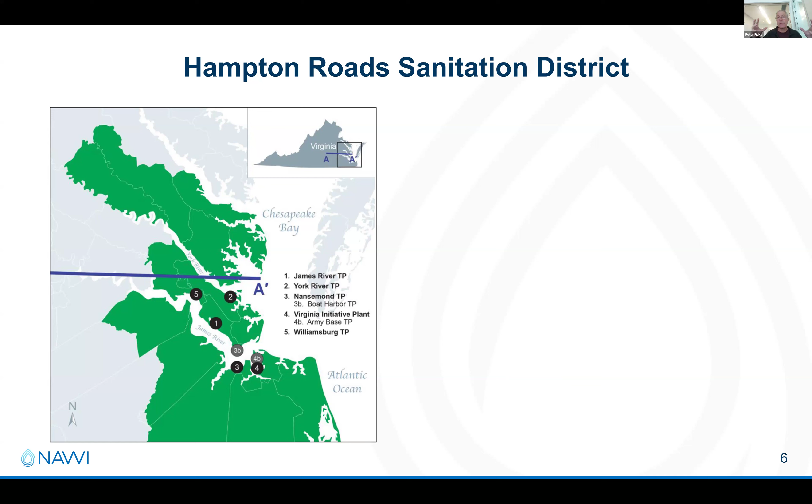Many of you know this well, but I think one of the things that makes Hampton Roads so important is that Hampton Roads is a national treasure, because it's the confluence of a bunch of circumstances.

First of all, it's the 14th largest wastewater utility. It serves almost 2 million residents and multiple cities around Eastern Virginia. But the key thing that really puts Hampton Roads into the special place that it is, is that it's at the mouth of the Chesapeake Bay, one of the most sensitive estuaries in the United States.

In fact, it's one of the places in the country where concerns about nutrient management first really drove innovation, both regulatory innovation and technological innovation. So because of where they live and the role that they play, Hampton Roads ends up being a very important partner for us as we innovate on how to create more sustainable water and wastewater distribution systems.

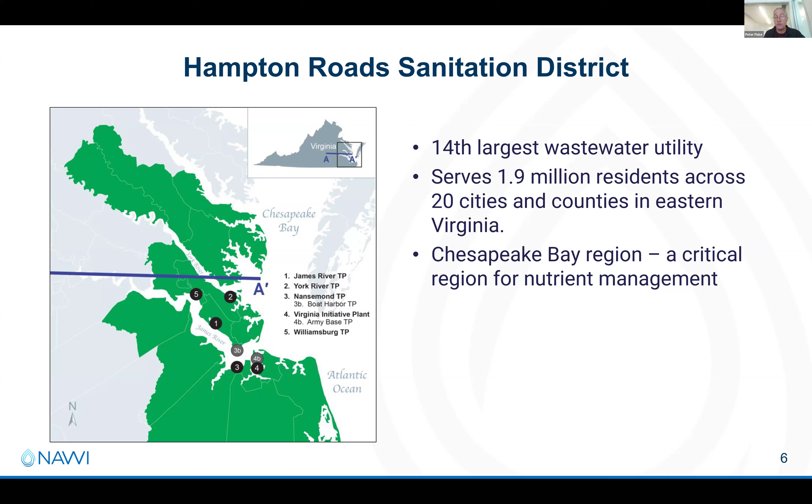And with that, I invited our guests here for us to learn more about this, not just the utility itself, but Charles and Jay, also the role and the way that innovation works and how you build an innovation ecosystem for the utility that you run. So with that, Jay, Charles, thank you so much for joining us here at NAWI, and tell us about Hampton Roads.

Great, can you see my screen okay? We can. Perfect, awesome. Well, great. Thanks, Peter, what a great intro that was.

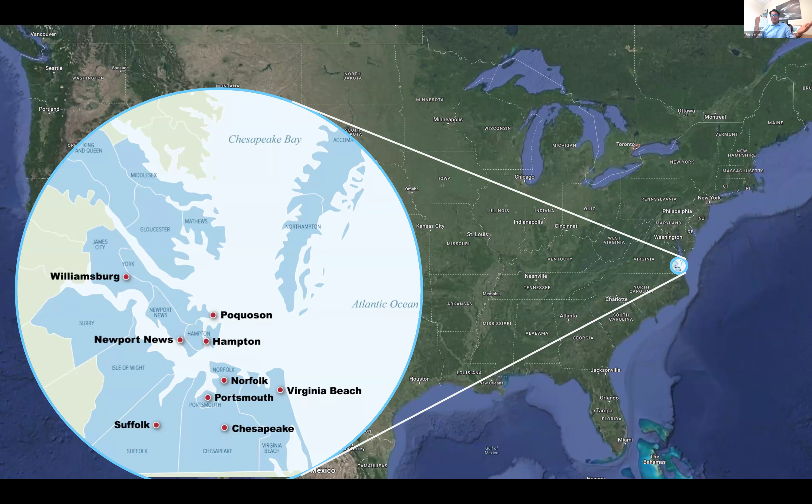Again, I can skip all my maps because you already talked about where we are in Eastern Virginia. We're the 14th largest, we serve 1.9 million people. What's crazy about our service area, it's 5,000 square miles, about the size of Connecticut. So I'm going to jump right into it.

Bottom line up front, we are trying to build this water technology focused ecosystem. Basically, we want to be the Silicon Valley of water technology for the country. And so what we're trying to do is leverage HRSD as an anchor for economic development, and we'll talk a little bit more about that.

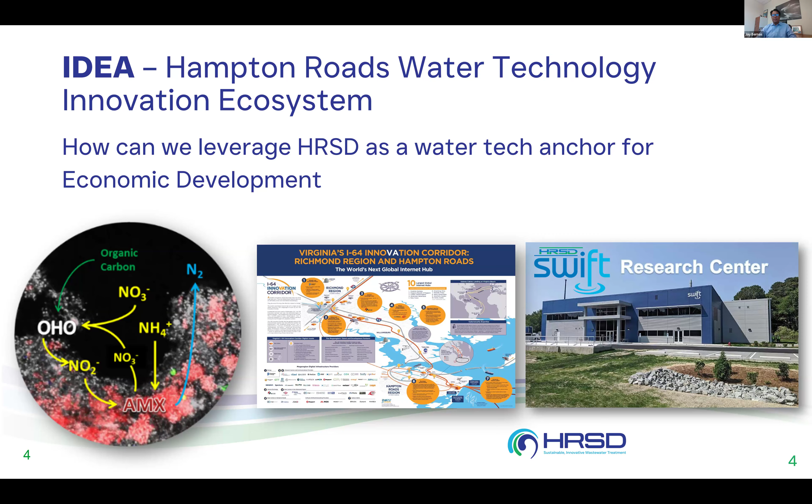So these are our objectives. Obviously, we want to advance water technologies. In our minds, we want to be tech enablers, and we'll talk about the ecosystem concept we're trying to develop. One of the things we've always done is research ways to keep our ratepayer bills low, and so in our culture, it's embedded in us to be innovative.

Dr. Bott's going to talk about what our current focus areas are: process intensification and decarbonization. One of the reasons why we are here today is to foster collaboration and knowledge exchange, because we're trying to build partnerships around the country to build out this ecosystem, and at the end of the day, we're trying to create this demand side innovation.

So big picture, this is really an optimization problem. If you take a step back and look at our organization and our great assets, we've got one of the largest R&D groups in the country. How can you optimize that to make a larger community impact?

We're a political subdivision of the Commonwealth. We exist to protect public health and the environment, but surely we can do more if we leverage all these assets. One of the ways we can do that is by driving economic development through this whole ecosystem concept.

So these are the four opportunities that we've identified. One, we can incubate or accelerate companies. So working with Imagine H2O and Xylem, I had a great meeting with Xylem Labs today. We can attract companies potentially. One of the ways this idea really came about was last September, Dr. Bott was like, oh yeah, by the way, some folks from Samsung are flying in from South Korea.

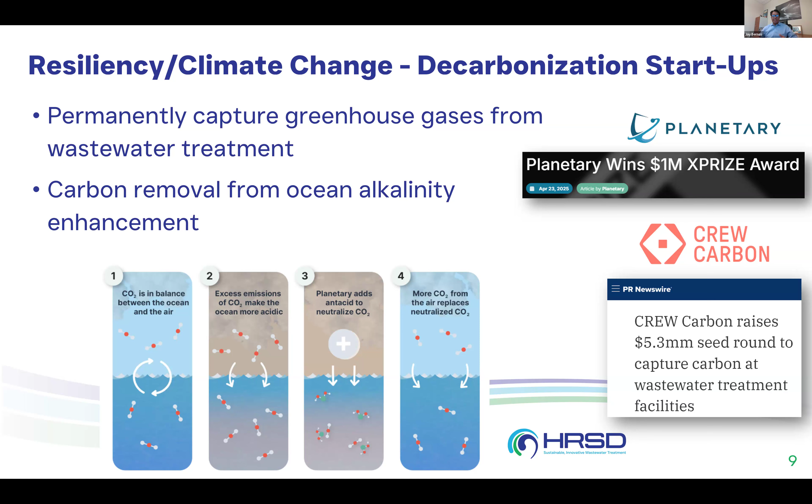So just think about that. HRSD is going to install this tech at our plants. Other utilities will see that, they can come visit, see that the tech works. We'll have all the data, and we will help those companies scale.

So here's the idea about industrial symbiosis. This is one of our plants in Virginia Beach, called our Atlantic plant, 54 million gallons a day capacity. Many plants around the country have hundreds of acres around them because this acreage was purchased as buffer.

Because we're a political subdivision, a tax-exempt entity, the city of Virginia Beach receives no revenue for that vacant farmland. So from an optimization problem, what is the highest, best use of that land? Could it be a data center that can use that digester gas? This plant averages 40 to 45 million gallons a day - could they use some of that water to recycle for their cooling?

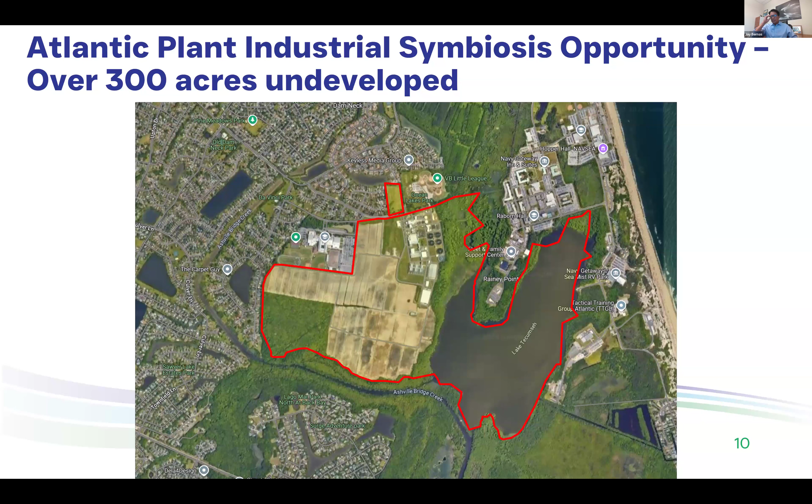So we just had a meeting this week about a potential data center that may co-locate on this property. But again, the whole circular water economy concept - what can we do with our existing assets to leverage them to make a difference in our community?

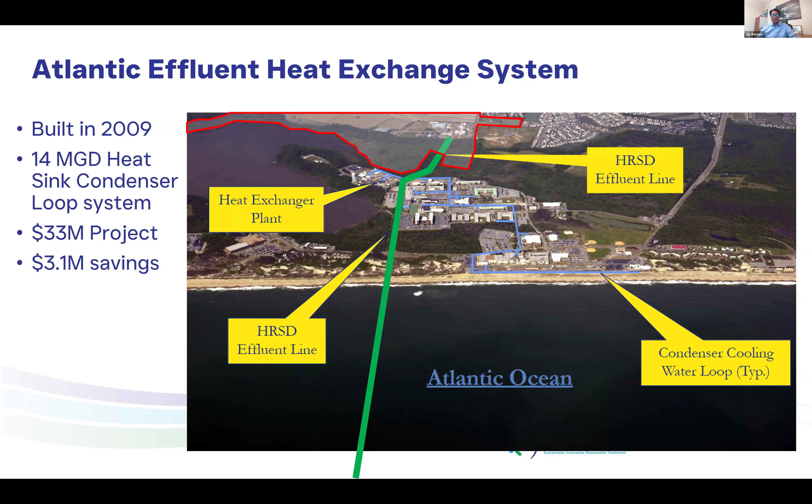Here's an example: there's an adjacent military base next to our Atlantic treatment plant. In 2009, they tapped our 66-inch effluent because wastewater is at a relatively stable temperature. They created a heat sink condenser loop system, like a geothermal system at their plant site. In 2009, they saved $3 million a year, and this is still in operation today.

So I'm going to shift gears real quick and talk about our SWIFT program. It's one of the largest water projects of its kind in the world. Bottom line up front: we saved our region $5 billion.

Like Peter said, we are part of the Chesapeake Bay region, but that's one huge regulation. The second big regulation we're dealing with is sanitary sewer overflows. Had we not collaborated with our region, and everybody did their own thing, we would have had to spend $7.8 billion complying with these 2 regulations.

But what we did is we leveraged EPA's integrated plan. EPA's integrated plan framework recognizes that communities don't have unlimited funds to spend on these environmental projects. And so the judge approved our plan in February of 2022.

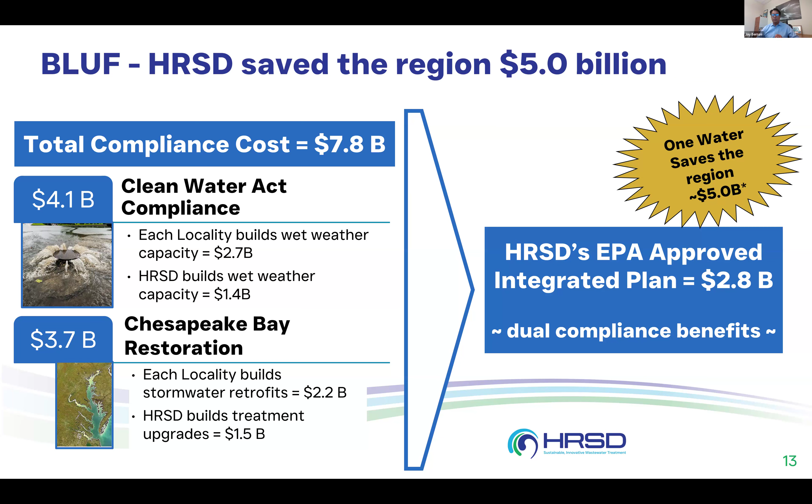Basically our SWIFT project, the Sustainable Water Initiative for Tomorrow, has dual compliance benefits, and we can do this for $2.8 billion. That saved the region $5 billion. This is probably one of the best examples in the country of not just integrated planning, but using one water for your community, one water concepts.

So this is what SWIFT is. Currently, we take our highly treated wastewater effluent and discharge it into the bay or into the ocean. The idea is dropping an advanced water treatment plant adjacent to an existing wastewater plant, pumping that water.

That water is taken to drinking water quality standards and pumped into our aquifer, creating a sustainable groundwater supply. It also reduces the nutrients going into the bay. I'll talk a little bit about how we could potentially reduce, stop, or slow the rate of land subsidence, and also protect groundwater from saltwater intrusion.

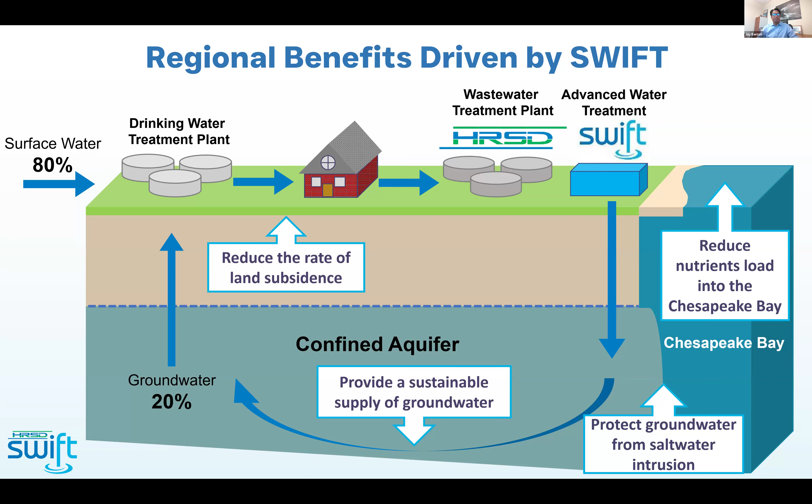I know there are a lot of water reuse folks on the call, but for members of the public who aren't familiar with water reuse, they may not know that this is going on not just around the country, but around the world.

In terms of nutrients, just to quantify the difference we're making, if you compare 2021 to 2028, we are reducing total nitrogen by over 70%, and reducing total phosphorus by over 50% with this project.

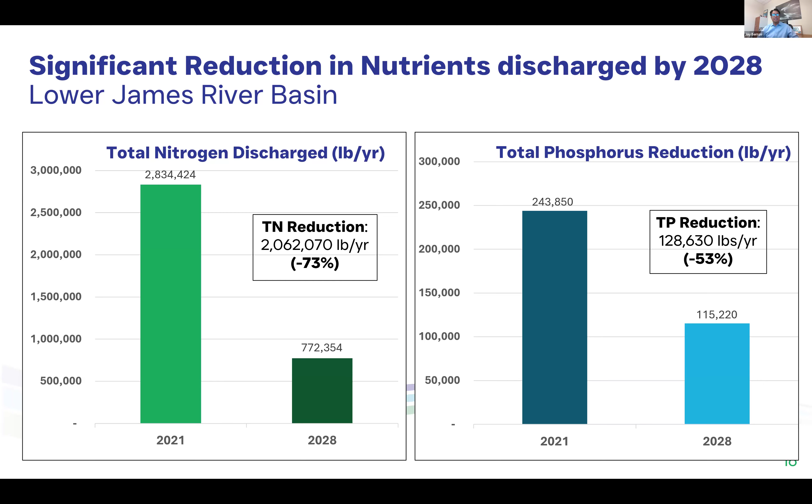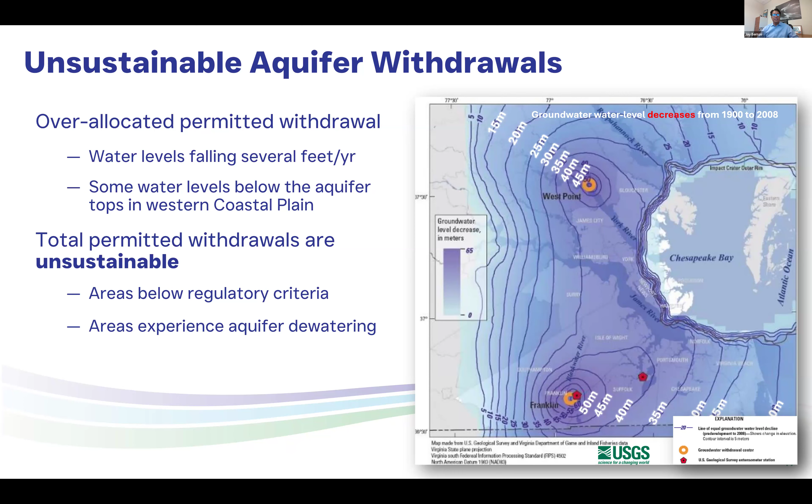The idea is, and we've got data suggesting, that if we can pump water back into the aquifer, we can either slow or stop the land subsidence component. About 50% of observed sea level rise is attributed to land subsidence, and about half of that is due to over-withdrawal of the aquifer.

If you haven't heard, Jakarta is the fastest sinking city in the world. They're primarily sinking fast because of all the wells—they're pulling water out of the groundwater and it's causing them to sink. They're an island right next to the ocean, so now they're experiencing significant sea level rise, and they're actually looking to move their capital city inland.

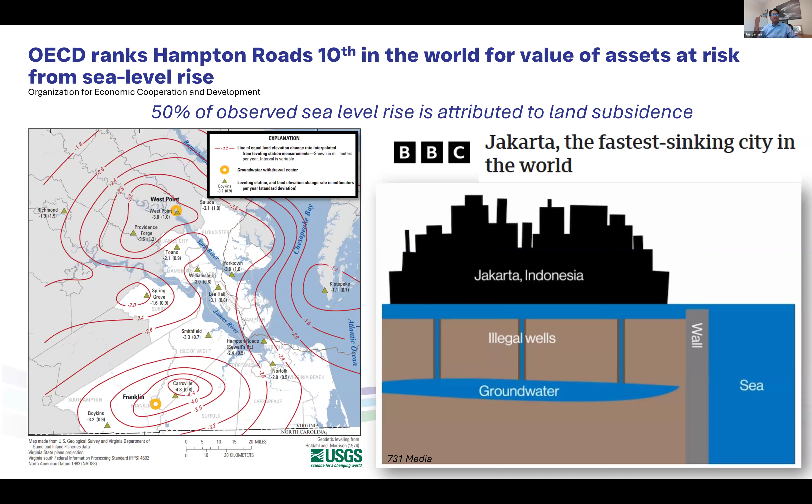So this is a quick update on SWIFT. We're looking to put 50 million gallons a day of SWIFT water by 2029 with 2 plants. The first plant will come online in 2026, and the second plant will come online in 2029.

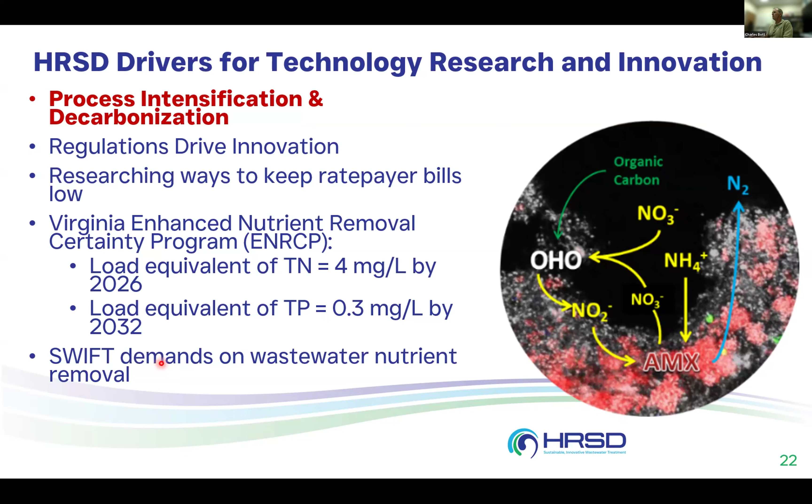So speaking of SWIFT, I'll talk about some of our interests. So first of all, SWIFT is really based on CBAT, or carbon-based advanced treatment. No membranes, and one very important part of this from an advanced treatment standpoint is that it requires a really good wastewater plant upstream doing really good nitrogen removal in particular. And that, of course, brings some other benefits in terms of emerging contaminants.

We've done a lot of work on co-metabolic 1,4-dioxane removal with propane addition, and this is actually operating full scale now at the research center, and is in design for the second full scale facility. We've also done a lot of work on removal of those emerging contaminants and disinfection byproducts through biofiltration.

A very important topic for us right now is minimizing GAC usage for PFAS removal. We have a number of projects, so minimize the amount of GAC that we use, or make the reactivation of that GAC more effective and more reliably mineralizing those PFAS compounds.

We've got a lot of work now going on recharge well design and operation. We've learned a lot about what not to do with recharge wells, and we're working hard to figure out what are the appropriate design and operational criteria for these recharge wells, which are a really big investment in managed aquifer recharge.

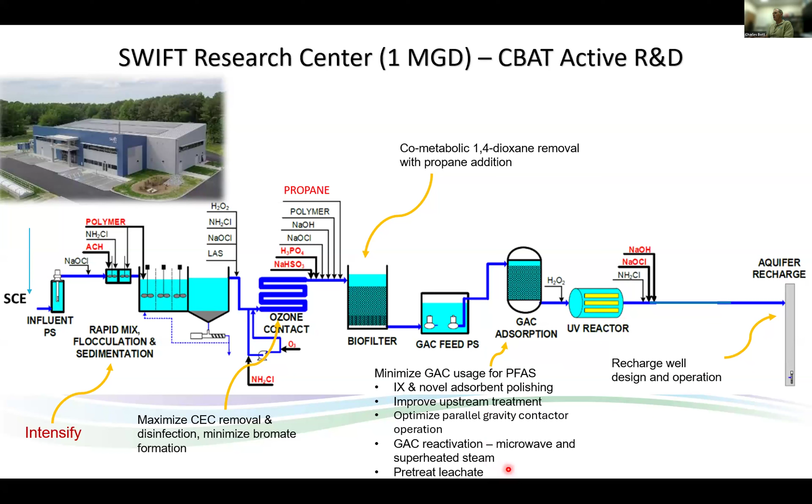We also have done work on pre-treating leachate as a means of better managing compounds, including both PFAS and 1,4-dioxane. So building on a successful pilot, now full-scale biological treatment of 1,4-dioxane at a landfill. This is a waste management landfill using tetrahydrofuran as a co-substrate.

So a few years ago, we partnered with Waste Management to implement that. It effectively removes all of the 1,4-dioxane from this landfill leachate in their existing biological treatment system, which was a really cost-effective solution for us and for Waste Management.

So building on that, we're now moving into specifically going after PFAS. That includes pilots of foam fractionation, which really, a foam fractionation pilot was not necessary. Lab testing was sufficient to confirm that foam fractionation would be effective on the pre-treated leachate, the biologically pre-treated leachate. So really, foam fractionation was not necessary.

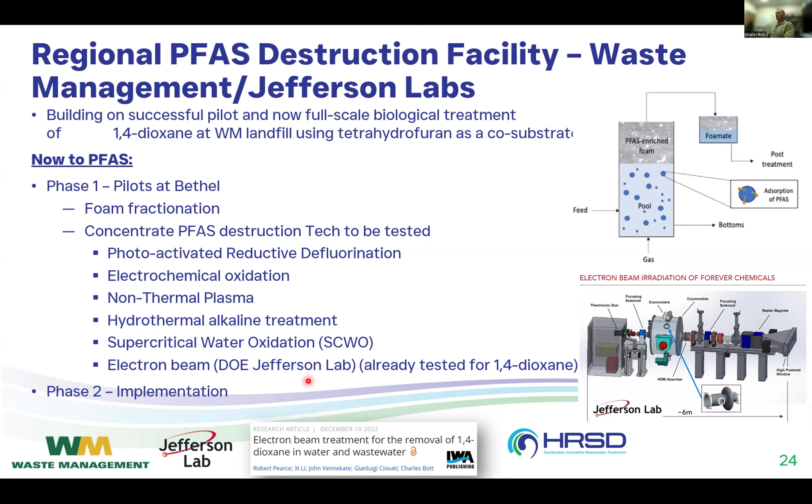So with that in mind, what I really would like to do now is take a bit of a deep dive into some of our work in the wastewater space.

I mentioned already that nitrogen removal in the wastewater plant is an absolutely fundamental and critical part of making CBAT work, and it's a critical part of what we need for compliance with the Chesapeake Bay program. We've spent a pile of money on the capital and now on the operational costs associated with doing nitrogen removal. The conventional nitrogen removal is what we know how to do.

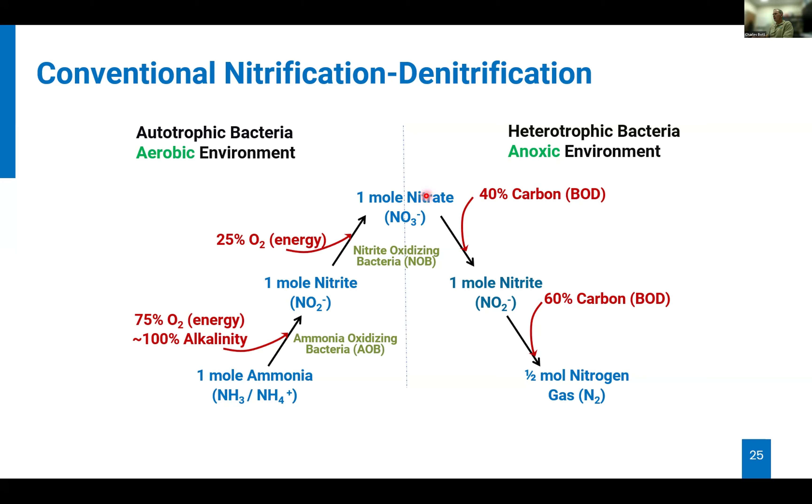Since we're taking a deep dive, I want to make sure everybody is clear on what we're talking about here. When we do conventional nitrogen removal under aerobic conditions, we oxidize ammonia to nitrate in two steps with ammonia oxidizing bacteria and nitrite oxidizing bacteria, although now we know about comammox that can make this oxidation in one step, one single organism. Then we do denitrification of nitrate back to nitrogen gas, and we know how to do this.

And for SWIFT and for meeting the low level requirements we need in the Chesapeake Bay, we know how to do this. But it's not easy. I mean, it's really challenging and it's really expensive, and it's already reliant on sensors and sensor-based control systems to make this as cost-effective as possible.

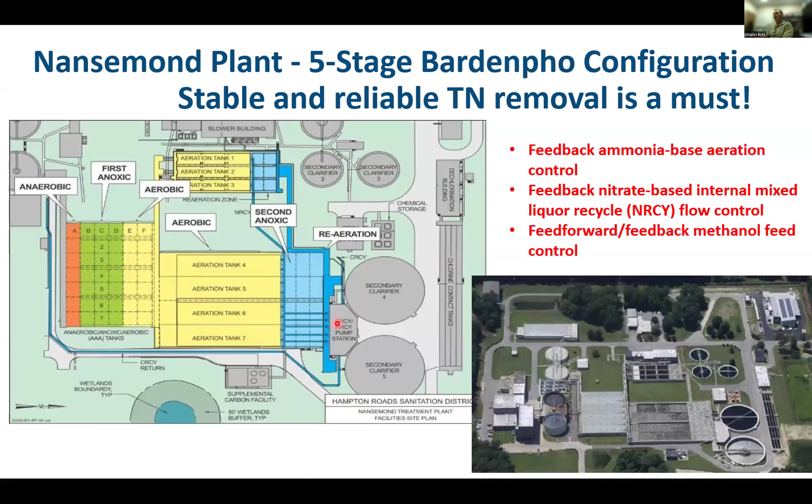It turns out that this is really hard to do in the mainstream part of a treatment plant. It's quite easy to do in the side stream and warm water that's very high in ammonia. We know how to do this, but in the main treatment plant, it's really a challenge.

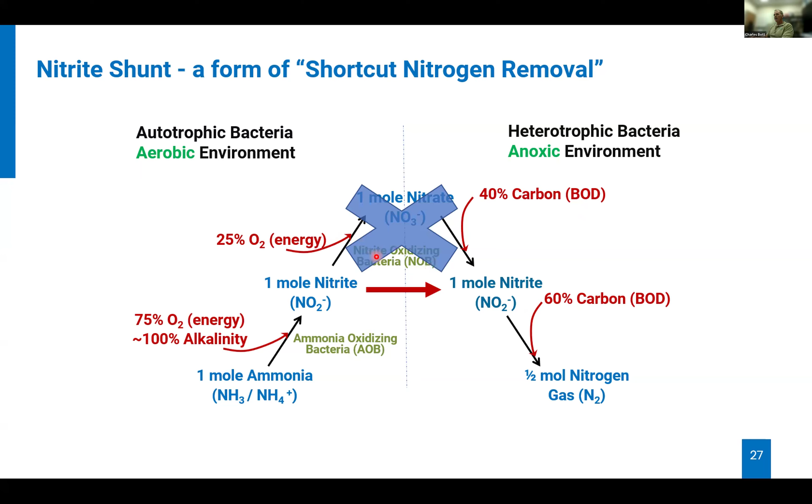And then if we take that one step further and start talking about Anammox, an organism that grows quite slowly but uses ammonia as its electron donor and nitrite as its electron acceptor, going straight to nitrogen gas, well, then we end up with a process that's now known as deammonification or partial nitritation, Anammox, PNA. This is, of course, the goal. This is where we want to go.

There are 2 big challenges: retaining Anammox and out-selecting NOB. Number 1, I think we've pretty well figured out. We know how to grow Anammox. They're tough, they grow slowly. We need to accommodate their slow growth rate, but we know how to do that. It's the NOB out-selection part that's hard, except in side stream. And so we've been doing this in side stream.

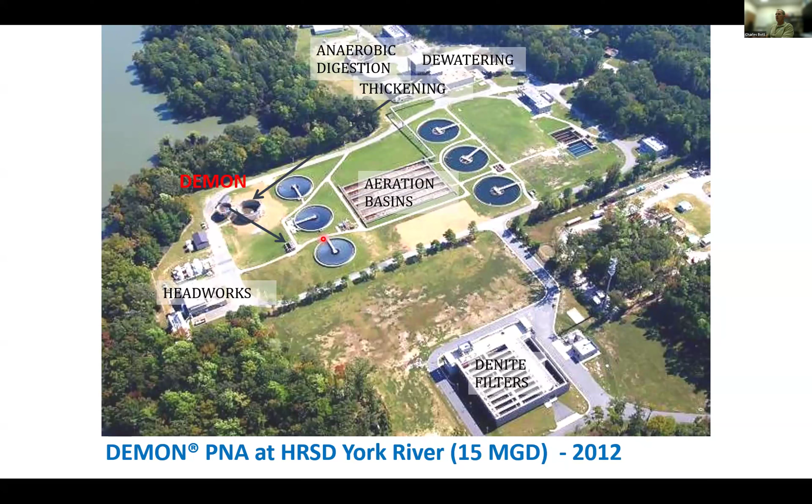We installed Demon at our York River plant in 2012. This was the first side stream deammonification process in North America. And this little tank here, that little baby tank there, treats about 20% of the nitrogen load on this plant effectively for free. So doing PNA on the side stream is just a no-brainer now.

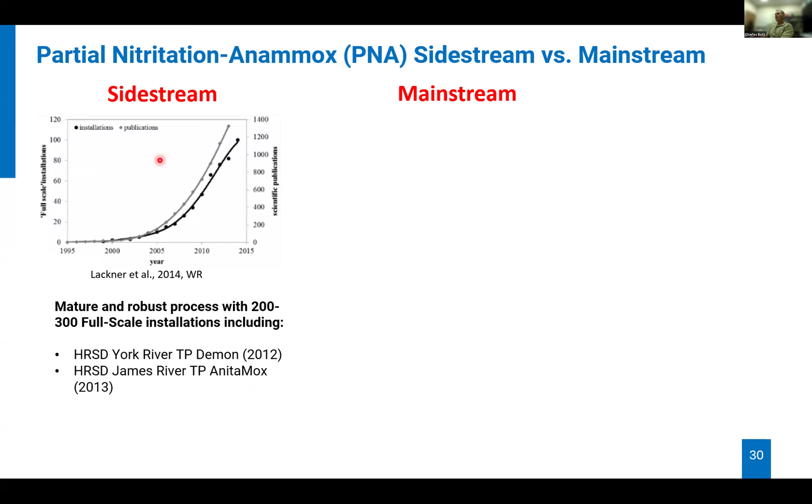We did it with a different process called AnitaMox at our James River treatment plant. We're installing another one at another treatment plant and starting that up this year. So side stream is no problem. It's mature now. It's not plug and play, but it's certainly mature.

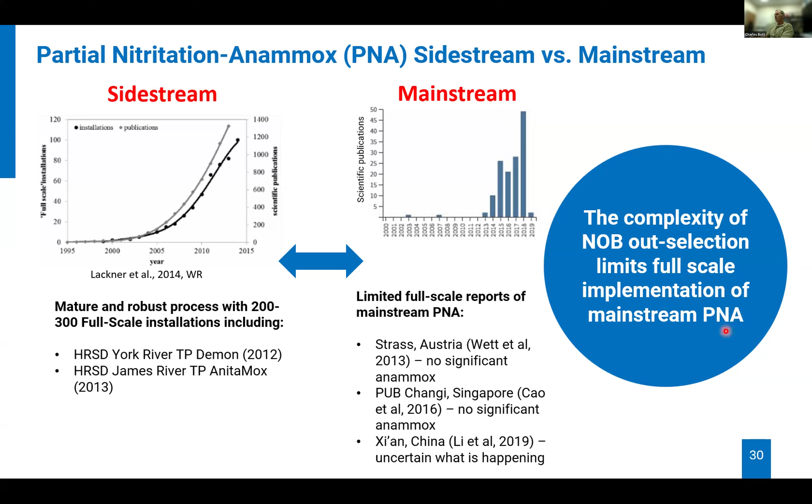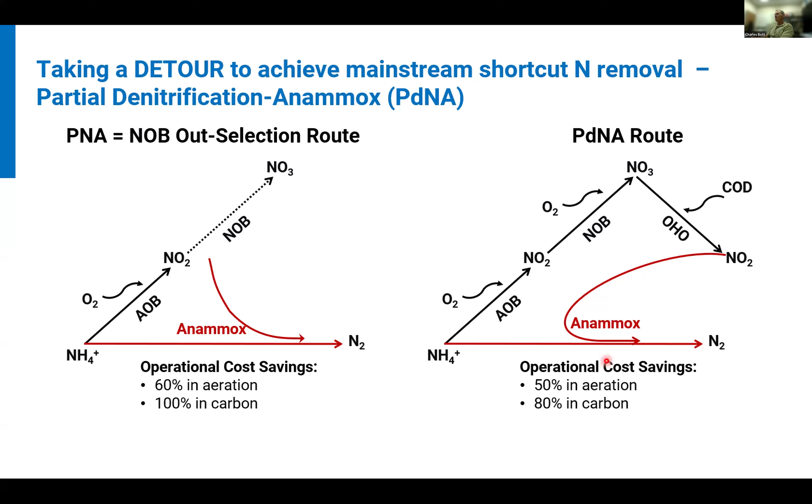So while we can't do mainstream PNA, what we can do is mainstream PDNA, partial denitrification. So instead of feeding nitrite to Anammox by shortcutting the nitrification pathway, we do it by shortcutting the denitrification pathway. This has been called PDNA now, and the detour to get to a shortcut is attributed to Heidi DeClippeleir at DC Water. We continue to use this word 'detour' to describe this.

So at HRSD, we set up a pilot facility back in 2012, and really that was focused, quite frankly, on mainstream PNA at the time. We didn't get serious about mainstream PDNA until around 2014, 2015, and things really started clicking. We went full scale immediately from there in 2018 at our York River plant. I'll talk about that a little bit.

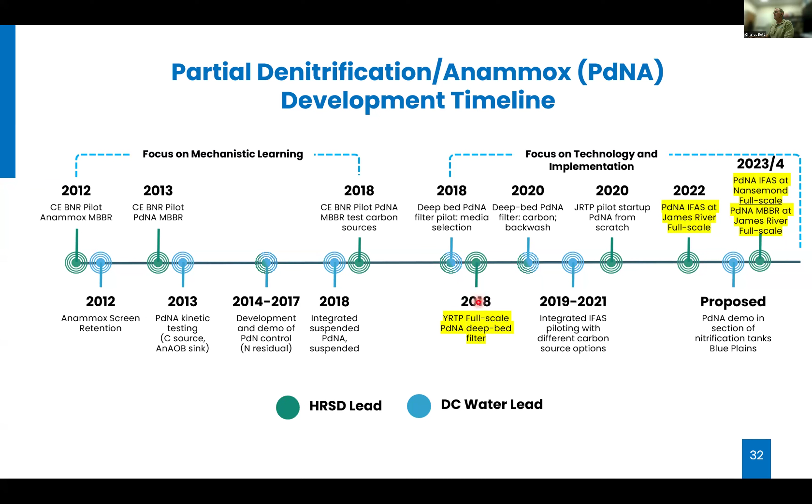And we finally got there. So this is being commercialized under the name Detour. And we're now doing this full scale. We're also still doing pilot work.

So the original pilot work ran from 2012 to 2018. We ran a filter pilot at York River from 2020 to '21, but that was after the full scale work. And then at James River, we're continuing to do MBBR and IFAS related work there.

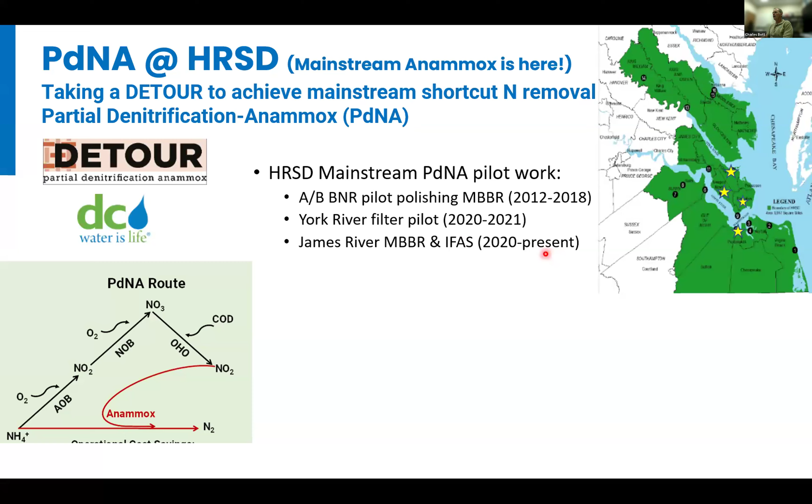From a full-scale status, I mentioned that we did PDNA in post-denite filters that were existing at York River in 2018. It took about a year to get to a stable place, but that's worth it for a 13 MGD plant operating at 13, about $1 million per year in chemical and energy savings. We completely eliminated a big project to upgrade that plant for more sustainable, conventional nitrogen removal. We just decided we didn't need that project at all, and that was because of getting anammox growing in the filters.

We've now upgraded James River plant, and I'll talk about that. That's IFAS in the second anoxic zone. We've established that full scale. That was a big deal because we actually designed and built a capital project and then established anammox. We were all very proud of that.

This was not an existing facility like York River. And then Nansemond is our second one, with a startup of the first tank in January of this year. We have a polishing MBBR at James River under construction in 2025 that will be starting up later this year. And we still have our sidestream PNA processes operating at all the plants where we need them.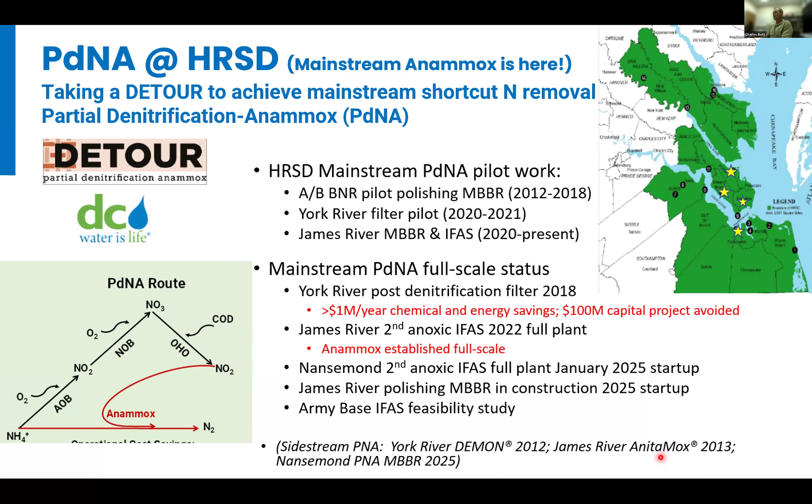So while we would like to have PNA, and while we would like to have anammox doing all the nitrogen removal at a treatment plant, this is what we know how to do right now. This is inherently most applicable for plants with pretty stringent total nitrogen requirements—so post-anoxic zone type things. Again, there are lots of other research topics, but this is what we know how to do.

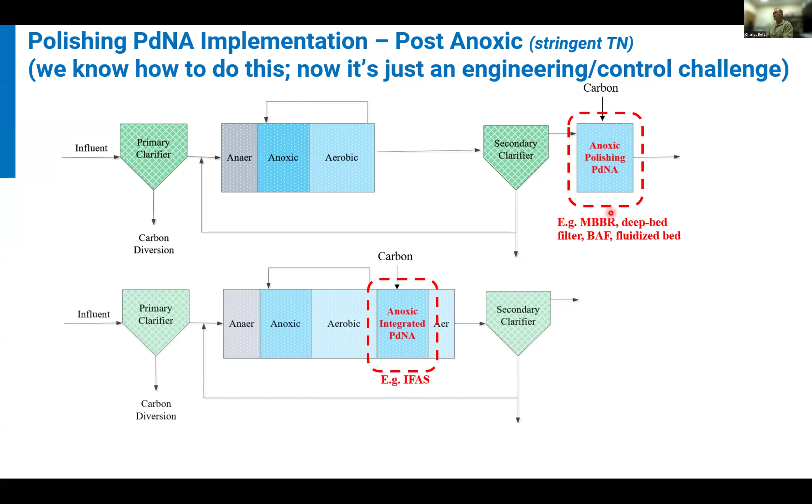So the York River example of doing it in a denite filter or in a polishing MBBR, which is also happening at the Noman Cole plant and one of the Fairfax County wastewater plants, and the second anoxic zone in an IFAS type application—regardless, it turns out the really challenging part is not growing anammox and is not achieving partial denitrification. The challenging part is feeding the process properly with control approaches like AVN, where we have to match the ammonia and NOx ratio in order to provide anammox what it needs to get to low effluent TN. We do that AVN control by manipulating DO, aeration time, step feeding, et cetera.

One thing that is super, super important, though, is that there are of course methanol and supplemental carbon benefits, and there are energy benefits, and probably opportunities to improve BioP by doing this, and minimize alkalinity addition. So there are all kinds of chemical, energy, and decarbonization benefits. But the big one for us from a cost standpoint is the intensification benefit.

Under normal conditions, we design aeration tanks and secondary clarifiers for a wintertime condition where we need to get the ammonia concentration to a low value. We no longer need to do that, because we have anammox in this downstream anoxic zone or in a filter. We can rely on that process to remove ammonia to the low levels we need under anoxic conditions, and that completely changes the paradigm for how we size the aeration tanks and clarifiers. So it turns out that PDNA is a very important intensification process as well.

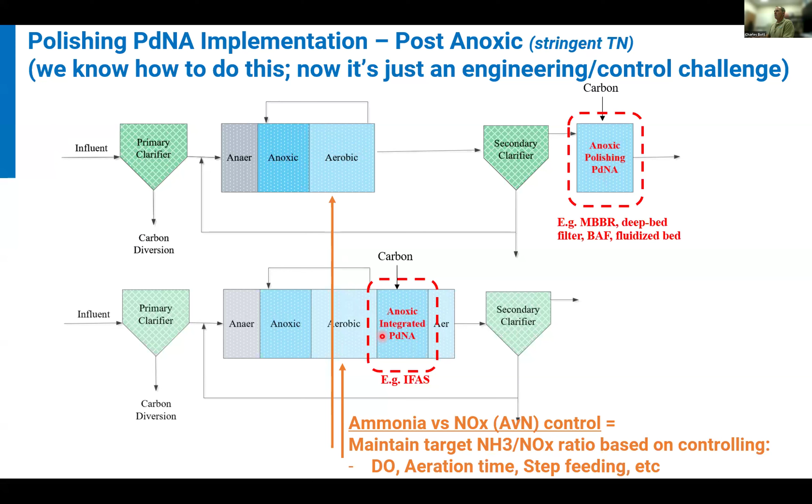So when we say intensification, what do we mean? Well, of course, we need to minimize the resource inputs we need. But from a cost standpoint, from a capital cost standpoint, it's the concrete tank size, the capacity of those concrete tanks that's super important - getting that capacity by improving BNR in existing aeration tanks and clarifiers.

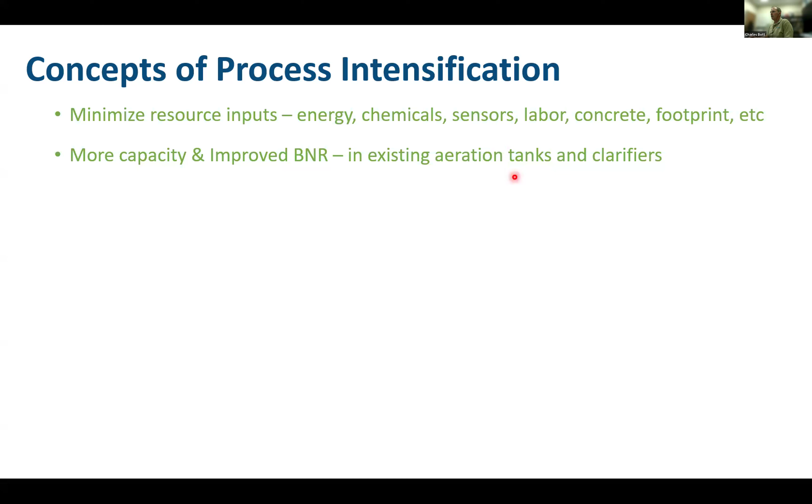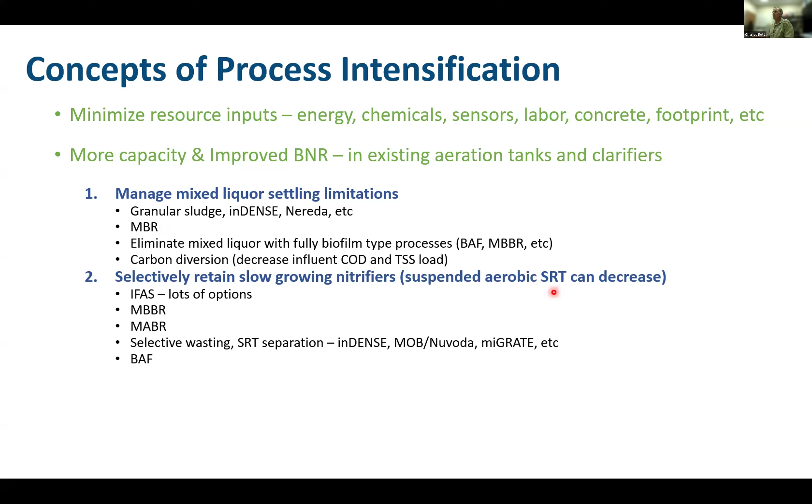This is my interpretation, but there are several ways to get that intensification done. One is to manage mixed liquor settling limitations - granular sludge, InDENSE, Nereda, MBR - where we don't even need to settle those solids. We separate them with a membrane, selectively retaining slow-growing nitrifiers, therefore decreasing the aerobic SRT, and can decrease aeration tank size - there are lots of options there. But one very valuable one that's quite relevant for plants with stringent nitrogen limits now is moving the ammonia removal out of the aerobic zone, and PDNA and maybe MABR give opportunities to do that.

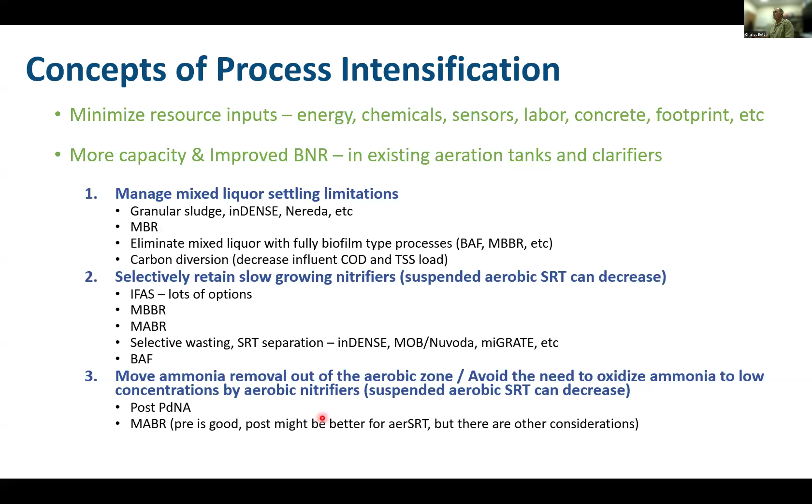So back to James River plant. At James River plant, we were able to carve out a very small second anoxic zone, and it can be small because it's IFAS anyway, because of the need to grow anammox. We put plastic media in this zone, and we added screens on the influent and effluent side.

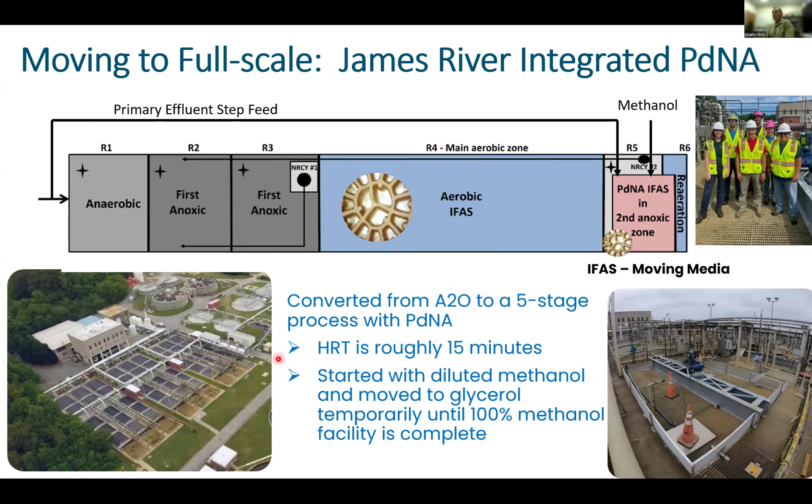We have only 15 minutes, and we started this up, and exactly as predicted by the pilot work that we've done over and over, it took about 3 months with virgin plastic media, about 3 months with 1 milligram of ammonia and 1 milligram of nitrite around to see our first anammox activity, and about a year to get to full anammox capacity. So that's pretty exciting, and we now have this in place in all of the tanks at the plant. This summer is very definitely anammox growing season for us at this plant, because next year will be when we're facing more stringent nitrogen requirements.

We've extended this to the Nansemond plant. We started up one of the six tanks here in January 2025, and what I mean by that is that we've taken the first cell of the existing second anoxic zone in these tanks, and we're building two additional tanks associated with a plant expansion. The first cell will be IFAS, and then the second two cells are full denitrification nitrate polishing.

We started up one of those tanks. We realized we made some errors in how these tanks are configured, and some design issues, so we got that tank out of service. We're making some changes, and we'll be doing that and putting it back in service in the next couple of months. This project and the James River plant are actually part of a DOE grant that AECOM is leading on PDNA right now.

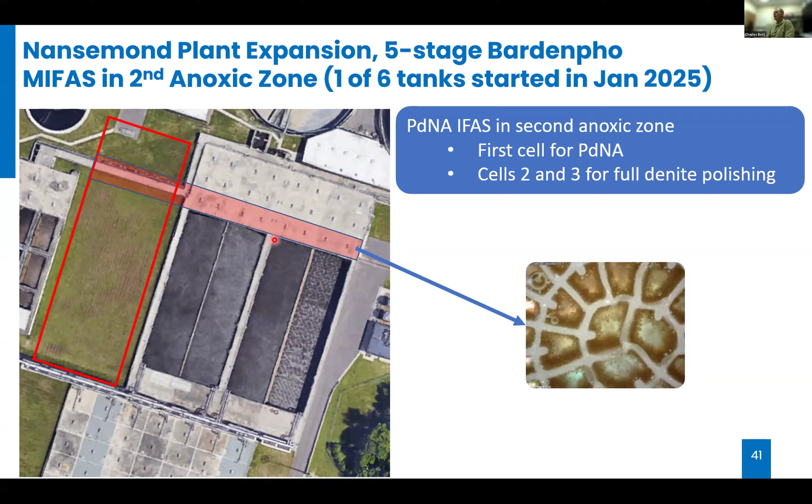Another of our technologies that we developed, actually also with work at James River plant done quite a long time ago now, is InDENSE. This is continuous flow densification using cyclones, and it's now been delivered at more than 100 active plants, with a couple of these as expected projects. So this is really moving quite quickly, and we're proud of this.

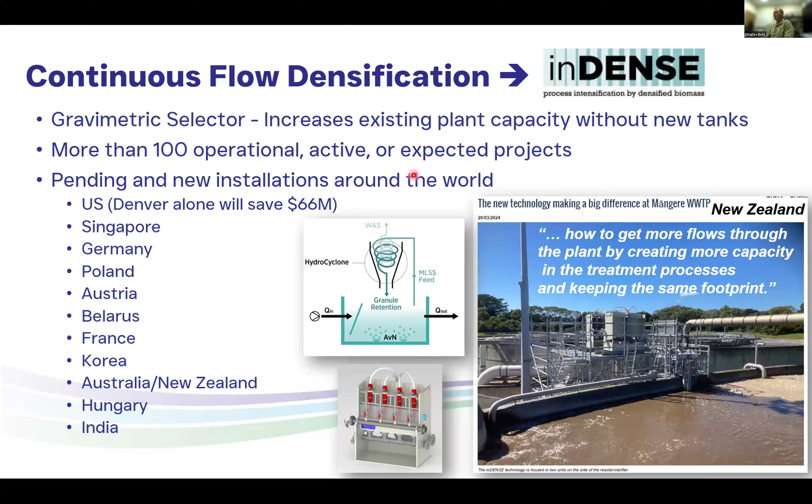And we are now, in HRSD, extending this to MemDense, which is the application of InDENSE in membrane bioreactor plants. Some of our small plants are membrane bioreactor plants.

One of the things that we're also excited about, and really have no choice in, is that as we operate more and more plants in ammonia-based aeration control and in AVN control, low DO is no longer really an option. It's sort of a fact - we're headed there whether we like it or not, and we really need to understand it better.

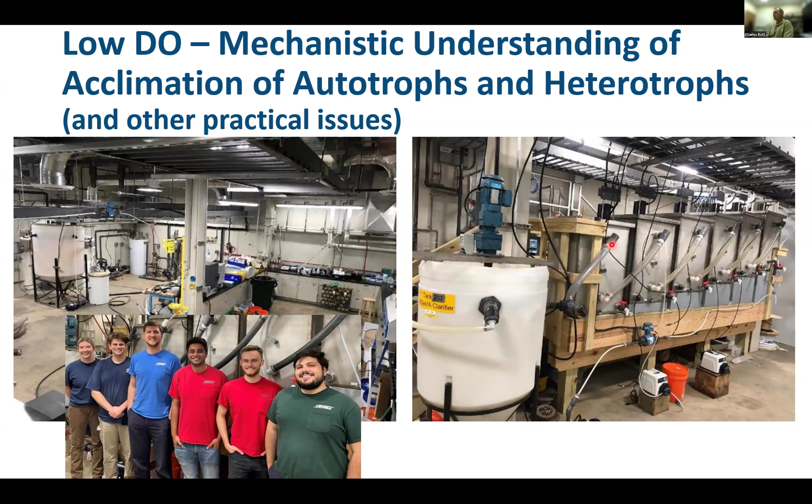So we took our BNR pilot facility and actually moved it to a different treatment plant. We have a new team of students - actually several groups of students have been through this facility as well - now focused on understanding the acclimation of autotrophs and heterotrophs to low DO. This is also a big emphasis now on biological phosphorus removal. So thinking about ABAC and AVN control, this is also something that we need to improve as we think about PDNA.

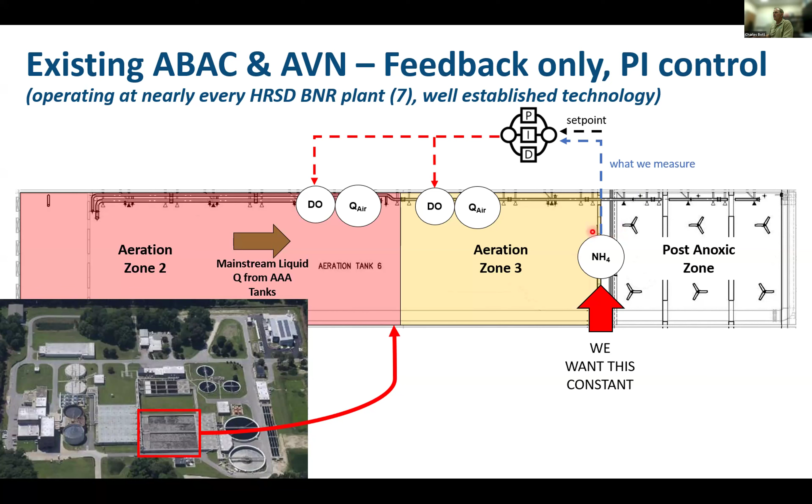Most of our plants operate in feedback ammonia-based aeration control, with an ammonia sensor and a PID loop controlling DO set points upstream. This is typically feedback-only PI control, and it works, but it's not perfect, and in most cases it's not sufficient for PDNA if we want to go to low concentrations.

So we set about a program to improve this, and the improvement of that PDNA is really focused on improving AVN control. So now it's ammonia divided by the NOx concentration, with two sets of sensors here. And there needs to be some feed-forward part of this.

There are several ways this is being done. One is a controller that adjusts for changes in influent flow. This is already applied to AVN. Mike Parsons set this up at James River, one of our treatment process engineers. While it sounds quite simple, it's actually pretty hard to program because that model is basically knowledge of what the DO set point should be based on influent flow. What makes this easy is that plant is already aerobic IFAS, so it's a lot easier to predict what the DO needs to be for a given flow rate or condition.

Ali Gagnon, who's also a PhD student at Virginia Tech and a treatment process engineer at two of our treatment plants, has worked on a really cool feed-forward model predictive controller, where she did regression analysis of a whole lot of process simulations using a calibrated process simulation model in Sumo, which is the modeling tool we generally use for all of our process modeling, and no additional sensors.

And then Jeff Sparks' work, which is a combined hybrid mechanistic model - again a Sumo model running as a real-time digital twin on the plant control system, combined with a data machine learning model and an added ammonia sensor. That is the feed-forward part, and it continues to be backed up by a PI loop for the feedback part. That's running in ABAC, and very soon AVN, as we establish more and more Anammox at our Nansemond plant.

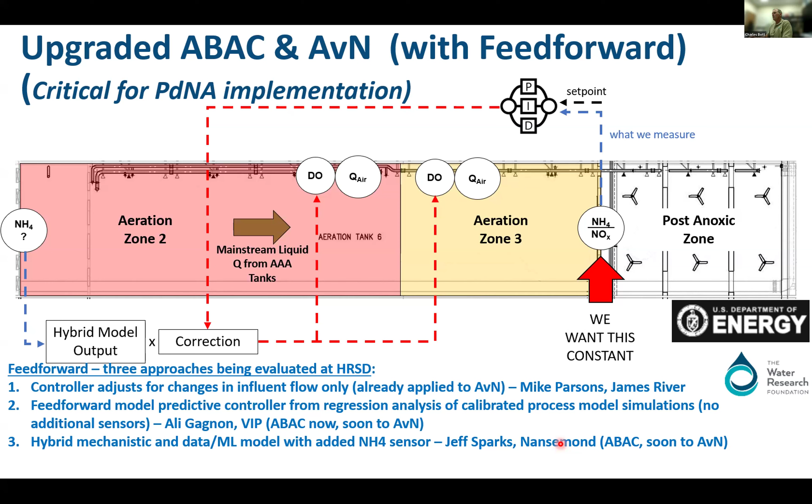We set up a program a few years ago with two pretty special guys, one named Josh Walker and another Arba Williamson - Josh has now been replaced with Shelby. The term 'Jarbalyzer' came from Josh and Arba, and this is our own HRSD designed and fabricated unit. We build these. These are colorimetric analyzers that do ammonia, nitrate, nitrite, and orthophosphate.

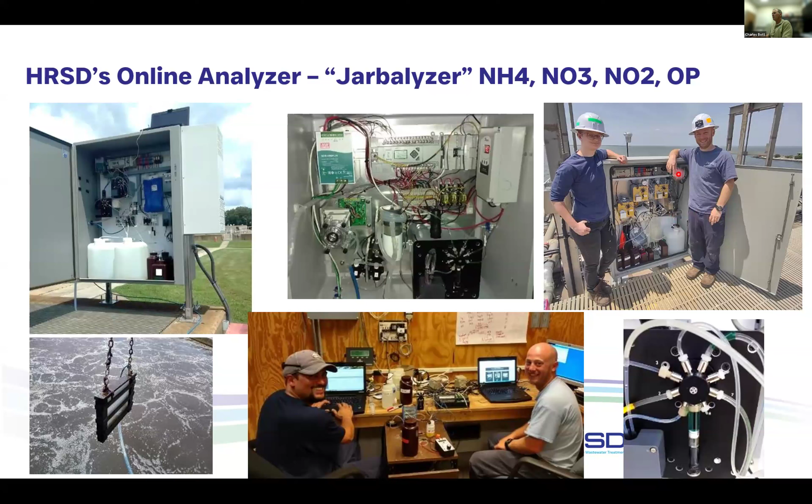We can do a lot of other things too. We've built about 20 of these, and we're using quite a lot of them now at our full-scale treatment plants. It's taken about 8 years to get this going, and there's some pretty innovative things built into this analyzer system that we're now working to commercialize. So this is the final product here at one of our treatment plants.

Another of our products is on the complete opposite end of that spectrum. This is a very super simple mixing system - basically an inverted siphon using air from the low pressure air system at the plant. This is known as a minion mixer now, because the guys at a treatment plant dressed one up like a minion, and that name stuck. We have these operating at six of our treatment plants.

We've now commercialized this as well. Very low capex - it's basically PVC fittings, uses low pressure air, basically no maintenance, and it's extremely low energy compared to mechanical mixing. But we don't claim that much, because most of our blowers are oversized anyway, and we waste a lot of energy pushing air into offline tanks regardless. So yeah, very low energy as well.

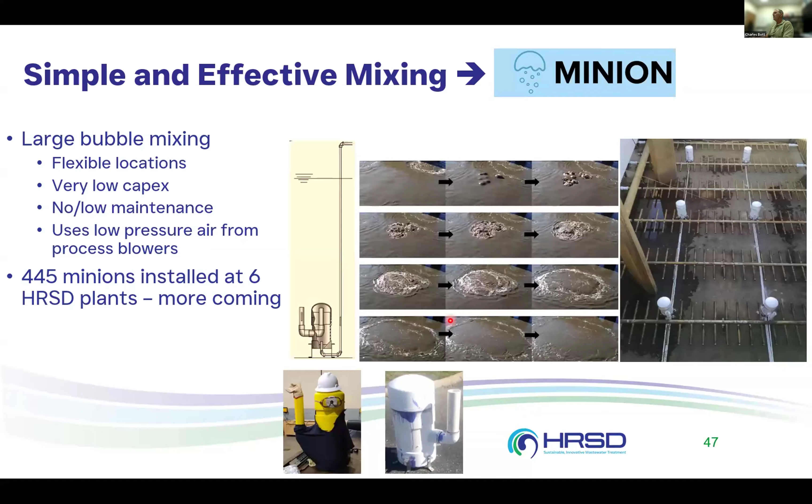So what's next for us? Well, PDNA is very important for us - we're going to continue to develop and deploy that. PNA is really our future goal, and we have research starting with the hypothesis that PDNA is really the path to PNA. I can talk more about that, but we have a lot of work getting ready to start in that area right now.

We always want to use wastewater carbon as efficiently as possible, and nitrate-based internal recycle control is an important part of that. Low DO - we're headed there whether we like it or not, and it just makes sense. If we're interested in doing good biological phosphorus removal, and that's what we are, making BioP truly reliable even in the summer, it might be that low DO is the pathway to get us there.

I know I didn't talk about BioP here, but we have a whole program on this as well. Sensors and controls is a big part of our work, digital twins, AI and ML, incorporating that right into plant control systems. But we don't forget about optimizing and designing well our PID loops. We're still reliant on PID loops, and we will continue to be reliant on them, so we like to make sure we do that well.

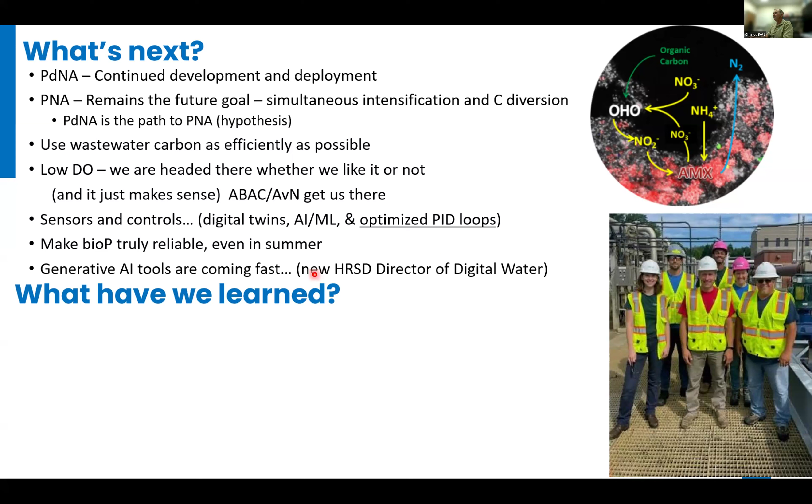We've just hired a new director of digital water. It's the same guy I mentioned, Jeff Sparks, that developed that really cool ABAC controller. He has about a dozen projects that are really cool that hopefully solve some interesting problems for us as well. So what have we learned?

Applied R&D managed the risk of deploying new technology. We didn't really have to wait to do DEMON — we were already working on mainstream PNA from an R&D standpoint. We didn't need to wait to do sidestream PNA since we were already working on mainstream PNA. Don't wait for others to bring innovations. Be the catalyst, not the client — that's kind of our motto, I guess. We remain relevant to our installed base of aeration tanks and clarifiers.

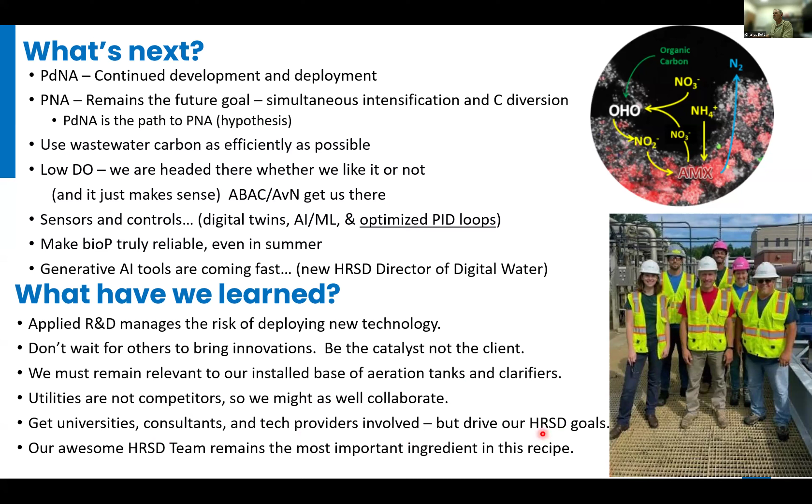We have mostly brownfield plants. We're not building new treatment plants. We've got a lot of aeration tanks and clarifiers that we need to use effectively. Our utility partners are not competitors, so we try as much as we can to collaborate, and we get universities, consultants, and technology providers involved, but we really need to drive our goals, and our team really is the most important part. So I'll turn back over to Jay here.

Thanks, Dr. Bott. Hopefully you can see through some of those pictures how elaborate some of our pilot setups are, and I think that's what's unique about us in terms of our ability to pilot technologies at scale. As Dr. Bott said, when we innovate, it's demand-side innovation where we are trying to solve a problem that exists. We'd love to build partnerships and collaborations, so please reach out to us — our contact information was at the front, and we can send that to you all. With that, Peter, we're ready to take any questions.

Great, you guys, thank you so much. And you're right, it changed a lot since the last time I heard this talk. So that's great. Charles, thank you so much for going in so deep.

I know everybody — just a reminder, the chat window is your avenue for asking questions of our guest today, and I'm going to get to those in a second. But I want to ask you one question first, Charles, because you alluded to it at the end: what do you think are the most interesting frontiers of new technology, new innovation outside water treatment that you think are going to inform water treatment? You mentioned AI and ML as obvious frontiers of research moving very rapidly — are there other research areas that hold particular promise for the work you guys do at Hampton Roads?